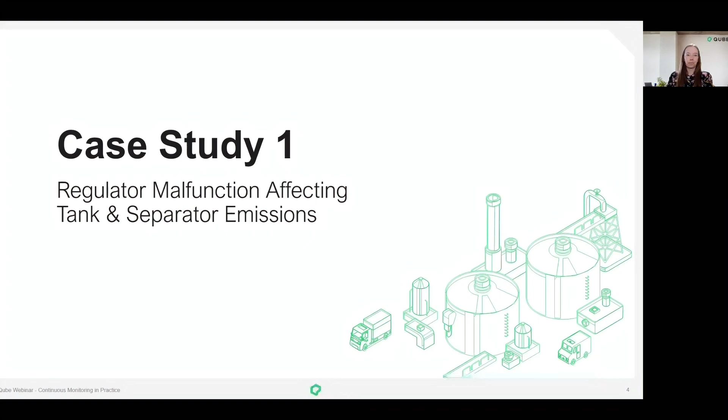So in this one, it involves a central tank battery and compression station equipment. A compression station equipped with 5 continuous monitoring devices around the perimeter of the site. At this site, the operator began seeing elevated emissions being picked up by our fence line sensors and localizing to their tank and separator area in the southwest corner here.

The one-hour rate spiked, triggering an alarm notification indicating an operational upset. Why this was of particular concern is their 7-day emission rate was trending towards the periodic screening threshold of 15 kilograms an hour, going into their monthly screening period.

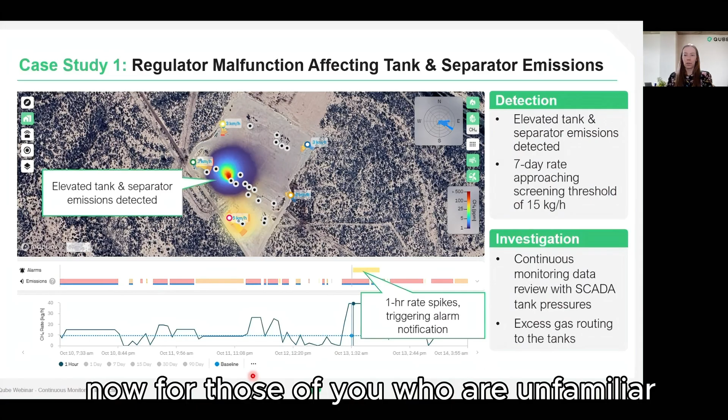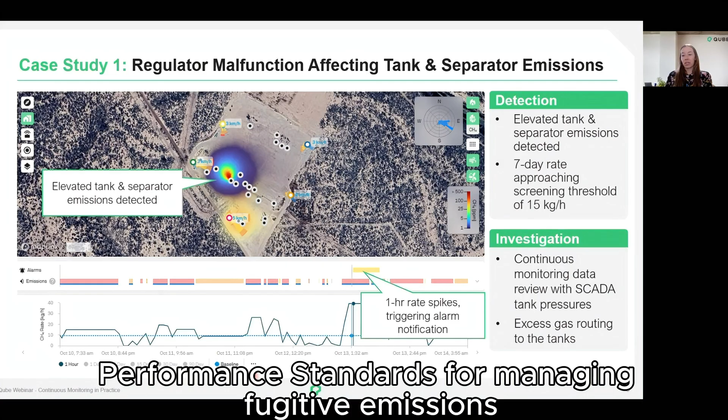Now, for those of you who are unfamiliar, periodic screening is an alternative compliance pathway under EPA's new source performance standards for managing fugitive emissions in place of traditional quarterly or semi-annual OGI or Method 21 inspections.

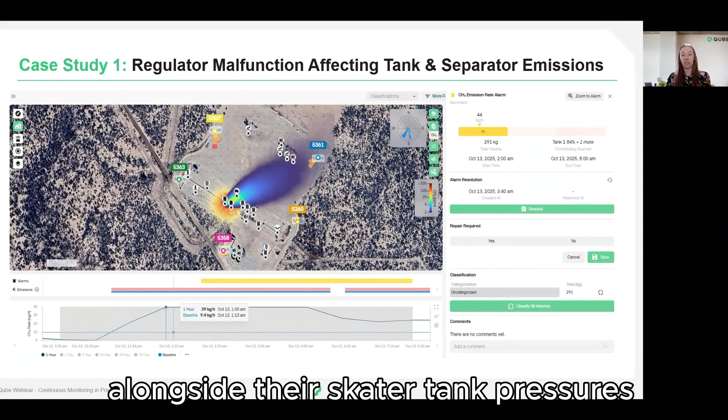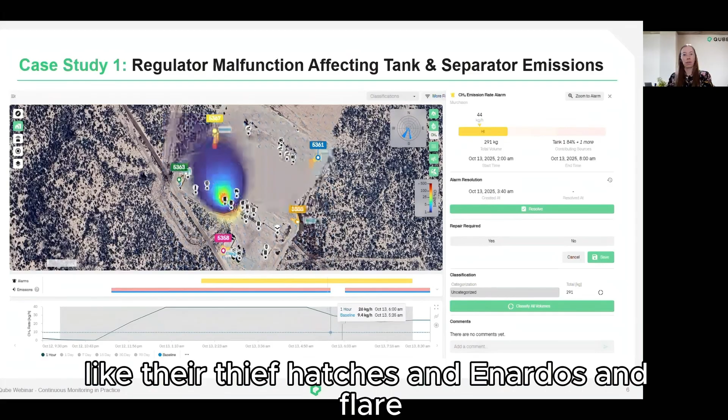So upon receiving that alert, operations reviewed emissions data alongside their SCADA tank pressures and confirmed abnormal emissions behavior with excess gas routing to the tanks. But the pressures were not exceeding thresholds that would normally indicate an obvious failure of one of their control devices, like their thief hatches, Enardos, and flare, which led them to believe there must be a secondary failure on one of those systems, along with the excess gas that was contributing to the elevated emission levels.

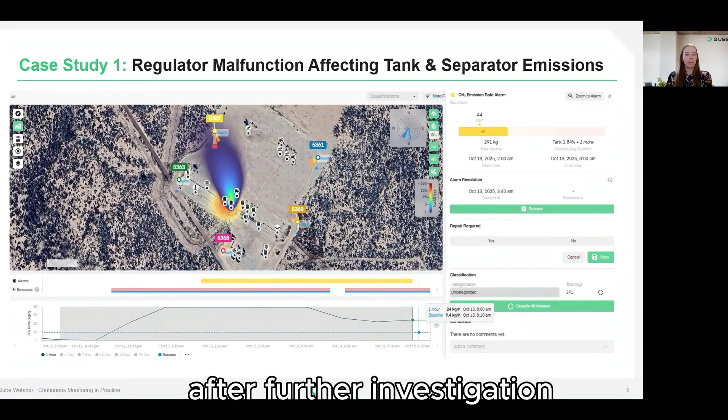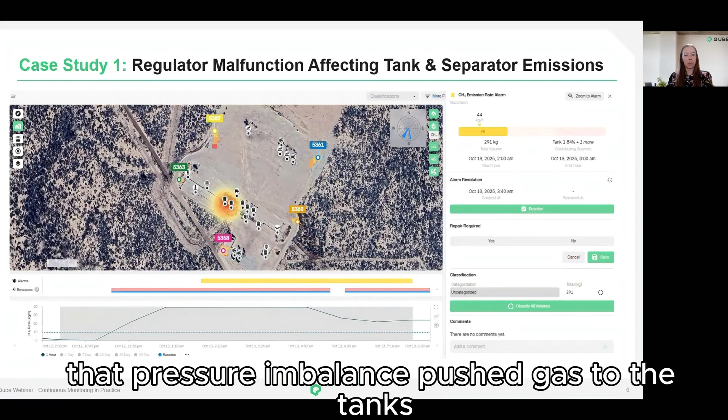After further investigation, it was identified that there was a malfunctioning back pressure regulator on the flash gas separator of their dehy skid. That pressure imbalance pushed gas to the tanks and contributed to emissions from a leaking thief hatch and corroded Enardo sealing surfaces. Once this root cause was known, the operator replaced the regulator and repaired the leaking thief hatch and Enardo components.

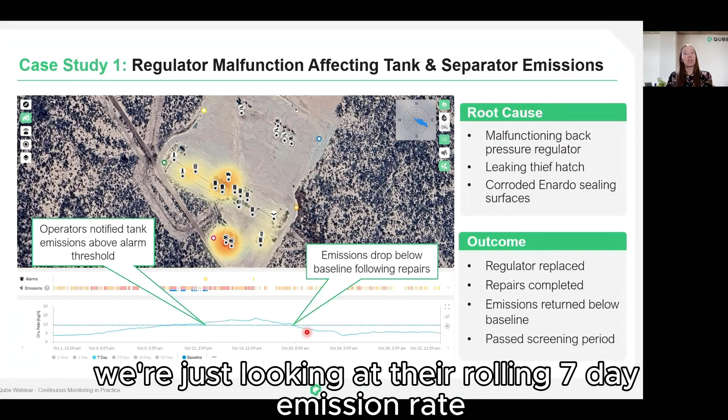The operator also pushed back their screening period because there is flexibility to move that within the month to the last week of the month while they were completing these repairs. Once they finished those repairs, emissions data, and you can see here, this is right where they were notified, things trended above their baseline. We're just looking at their rolling 7-day emission rate. Emissions then dropped below that baseline again. And they passed their monthly screening, which was awesome.

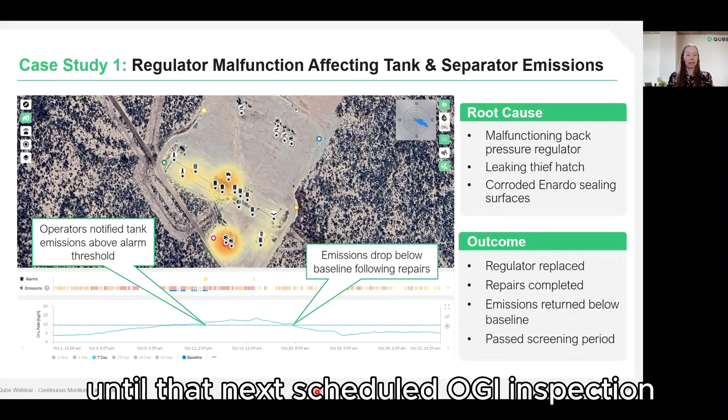So continuous monitoring provided visibility and data that helped the operators dig into this issue. Without that real-time visibility, this issue easily could have gone undetected for weeks or months until that next scheduled OGI inspection. Jumping ahead a little bit, because I want to highlight this operational savings for this particular case study. So continuous monitoring data helped identify these issues quickly. It also generated additional indirect cost savings for this operator.

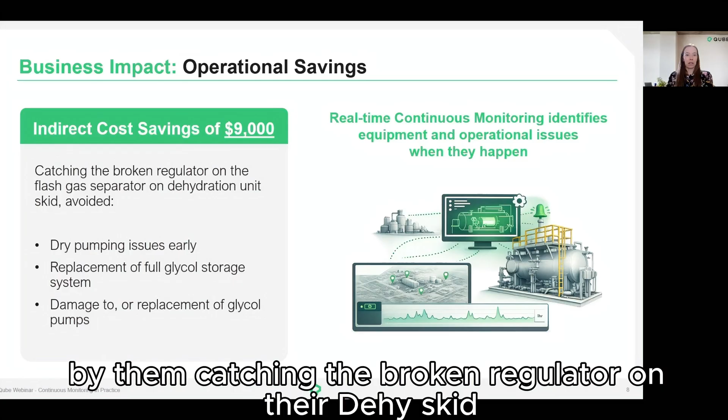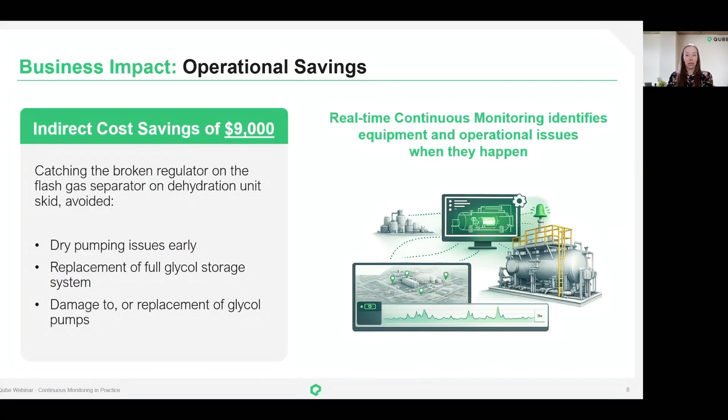By them catching the broken regulator on their dehy skid quickly, they were able to avoid dry pumping issues earlier. If this was left unfound for 4 to 5 days, the full glycol storage system would have been pumped away at about a $6,000 value. Damage to the glycol pumps themselves could have also cost another $3,000 to swap them out. So there's many benefits of continuous monitoring that are essentially intangible until operational teams actually experience them.